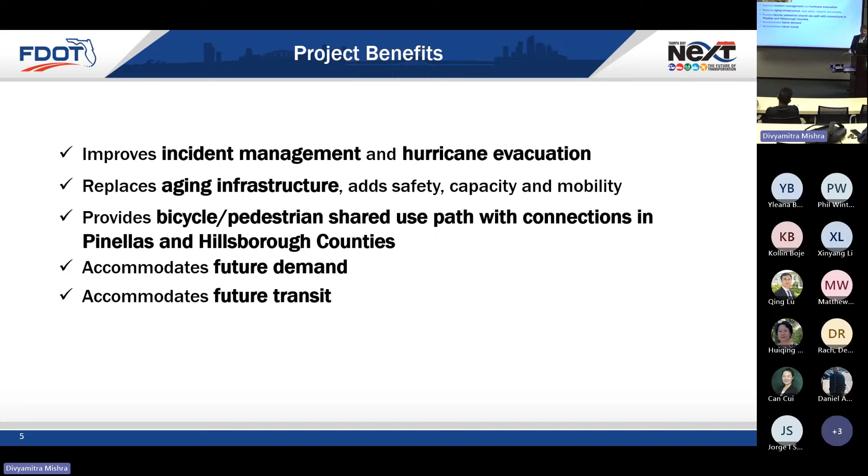I mentioned the bicycle and shared use path. That's a unique feature. I'm going to show you guys some pictures of what that's going to look like. And then the express lanes, which accommodate different modes of demand, whether we have managed with dynamic tolling or provide BRT in those lanes. And then we mentioned the future transit. So that's really the big scope of what we're trying to accomplish with Howard Frankland.

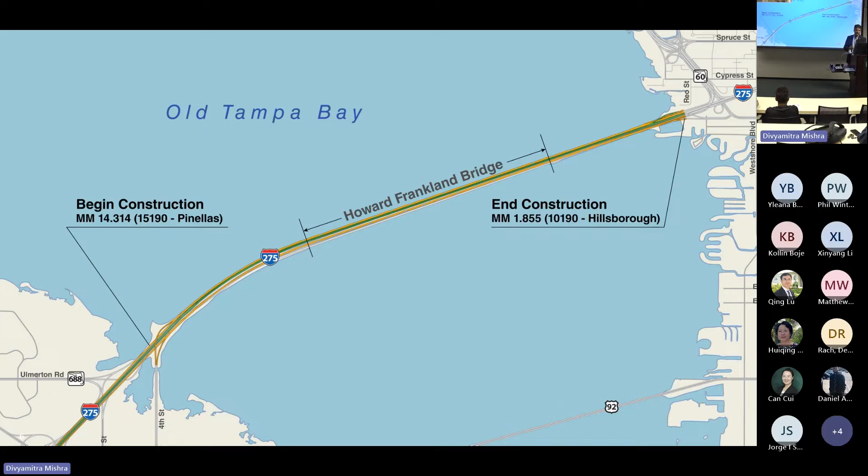All right, so to give you guys an idea, I'm sure everyone on this call or in this room has driven over this bridge. The corridor that we're constructing is about 7 miles long. The bridge itself is about 3. So of that bridge, you have the bridge in the middle, and you have causeways on either side of the bridge. So we're widening both the bridge and we're widening the causeways. You'll see that here in a minute for a place for the bridge to land. But this gives you an idea. It's pretty much encompassing all the land, the water and land mass between Pinellas and Hillsborough counties.

It's a very wide bridge. It's 168 feet wide. It is the second widest bridge in the state of Florida. The only bridge that's wider is a little heavily skewed box culvert down on the turnpike. So I'll say it's the widest bridge. It is the largest bridge by deck area. There is no bridge in Florida that has more deck area than the new Howard Frankland Bridge will when it's complete. Almost twice the amount of the Skyway Bridge.

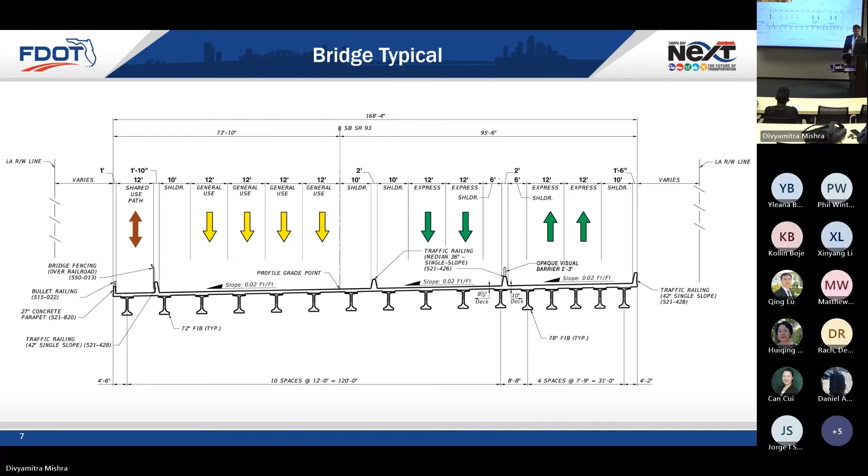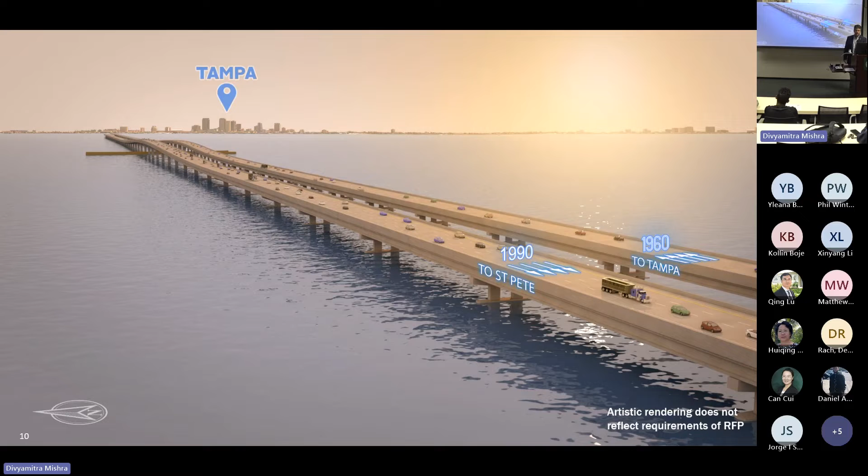All right, so just a couple animations here to help you guys understand the sequencing. Here's our current situation today. Like I mentioned before, you have the bridge on the right there that says 1960. Like I said, late 50s, 1960 when it was constructed. That carries northbound traffic to Tampa, and the 1990 structure that carries southbound traffic to St. Pete. So we're building the new bridge off to the north.

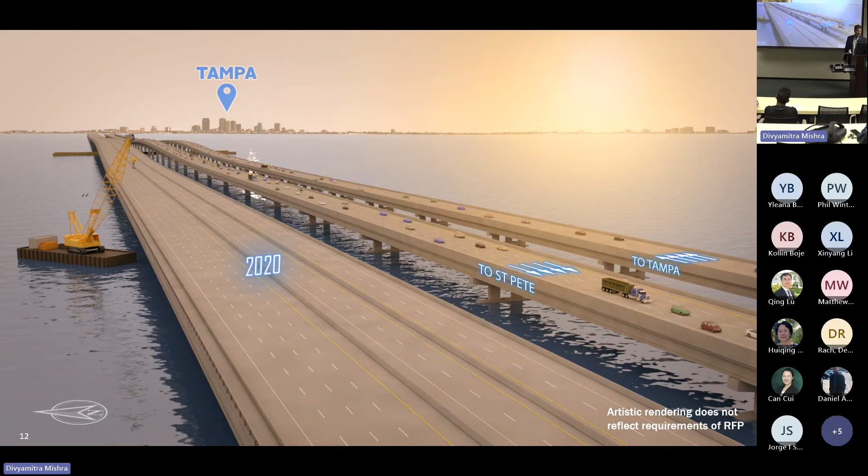So we're depicting here the typical construction method they use. Again, this is not what they actually built. This was prior to the project being let. So as we add on and construct on the north side, we'll eventually complete what we're calling the 2020 bridge. Well, hopefully the 2024 bridge when we get it open this year.

And once that bridge is complete, the first movement that we will change is the existing southbound movement. So here you can see traffic is moved on to the new structure that's carrying the southbound main line and the north and southbound express lanes. The bridge in the middle, we're doing some rehab on it. It's in good shape, but while there's traffic off of it, there's an opportunity to fix some joints, upgrade some lighting, things of that nature. So traffic will run on the old bridge until that point.

Then we'll move the northbound traffic to what was the southbound bridge. And then eventually at the end, we will demolish and recycle the old bridge. So the whole corridor will shift to the north slightly.

So let's talk a minute about bicycle pedestrian accommodation. So transportation, like we said, has changed a lot. We want to provide access as the DOT to all modes that we can. And we also know that with regional trail connectivity, there's a big push for that with micro-mobility and things of that nature. So Howard Frankland Bridge does its part by connecting existing bike facilities on the Hillsborough side. I think it even connects up to the Upper Tampa Bay Trail and takes those another option down to the Pinellas side.

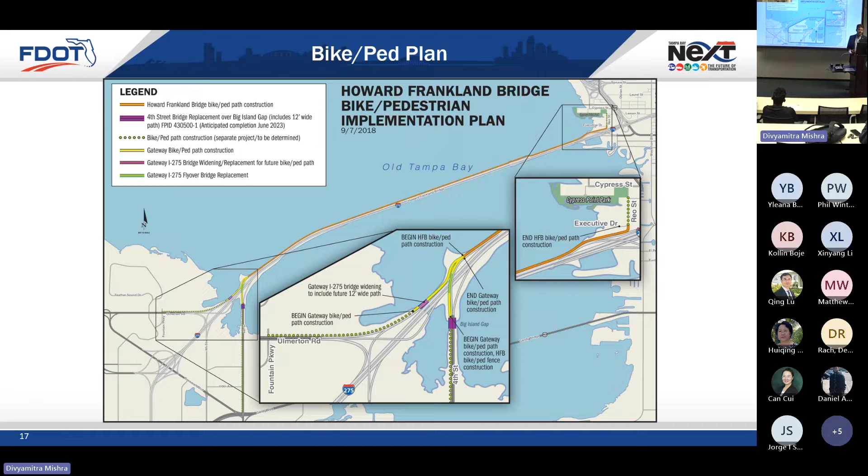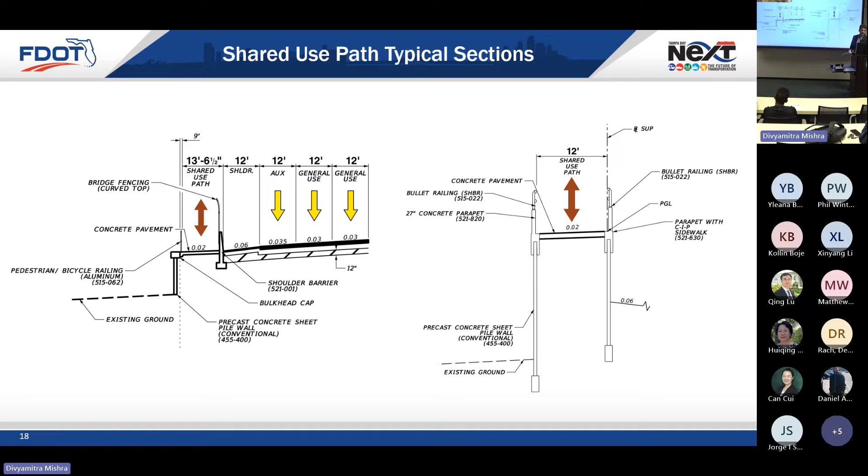All right, so just focusing a little bit more on what that looks like. The shared use path will be a minimum of 12 foot wide, and obviously meet all ADA requirements. It's going to be barrier separated from the roadway, so it'll be a safe path. But you can see here the variability that we've got in the width a little bit, 12 to 13.5 feet, and how we would snake it along the existing vehicular lanes.

All right, so another feature, like we talked about, was the express lanes. One of the reasons our express lanes work so well is they have fewer ingress and egress points; they're more for long regional trips rather than exit to exit. So with that, we do have some entry and exit points for our express lanes on both sides of the bridge. And with the department going to all cashless tolling, our toll gantries are important to, actually, I take that back. This is not that slide.

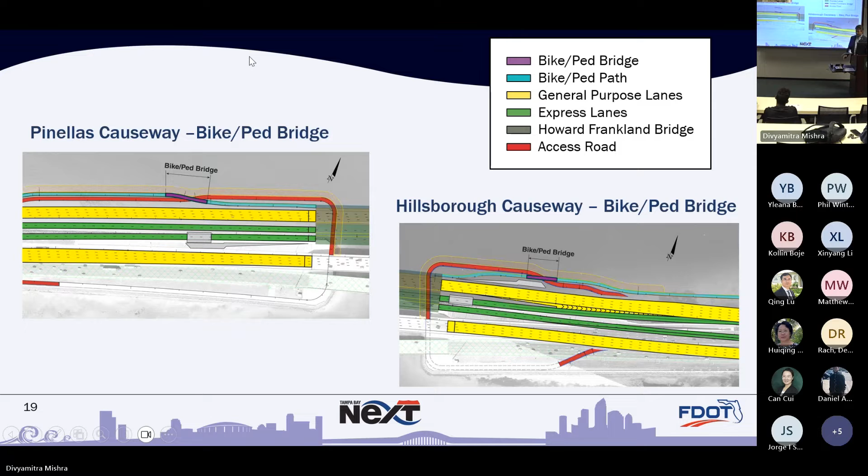On these, we had a vote for the aesthetic features. We went with a marine theme, so sailboats, and we sent a vote out to the community regarding the shape of the sails. So 2 main: Marconi sails and schooner sails. Marconi sails won out. I think it's a pretty neat little rest area if you're traversing over the bridge and you want to take a break. So we're excited about incorporating some of those aesthetic features into our bridges. Howard Frankland is not a signature bridge the way the Sunshine Skyway is, but it's still high visibility enough that it deserves an aesthetic treatment.

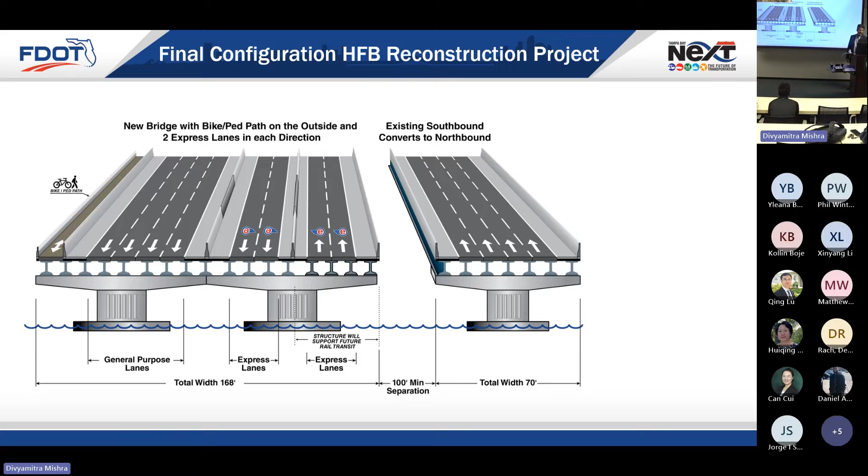All right, so in the future, what would a light rail system look like? This is just a prettier version of the typical section that shows, when we're open later this year, the configuration with the express lanes in both directions running on one bridge. So the idea in the future, if the region were to decide to construct a light rail system, we would take the northbound express lanes and convert those to fixed rail. And then we would have to widen the 1990 bridge to accommodate the express lanes, and the northbound express lanes would sit on their own structure. So no real plans for that yet, but we definitely want to make it possible in the future to do that as cost effectively as possible. So that is the plan for light rail.

What would that look like? Obviously, functioning on a concrete bridge deck, we're not going to use ballast. So instead, we'll have rubber boots with a tie block system that's anchored to the concrete. One of the things that's interesting on this job was, in case it were to be an electric type rail, you have to isolate stray currents through the bridge. Those could potentially cause corrosion. So we continuously grounded all of our rebar in the bridge to avoid that from happening.

Information there on the loading: rail definitely has a higher loading requirement than trucks or a typical design vehicle for a roadway. Here you can see we're designing right now for a diesel engine, a little heavier, but it could potentially also be an electric system depending on what ends up getting built in the future. To be clear, this is not Brightline. This is not heavy gauge track. This is more of either a rubber tired solution or some sort of light fixed guide system that we could potentially install on this bridge.

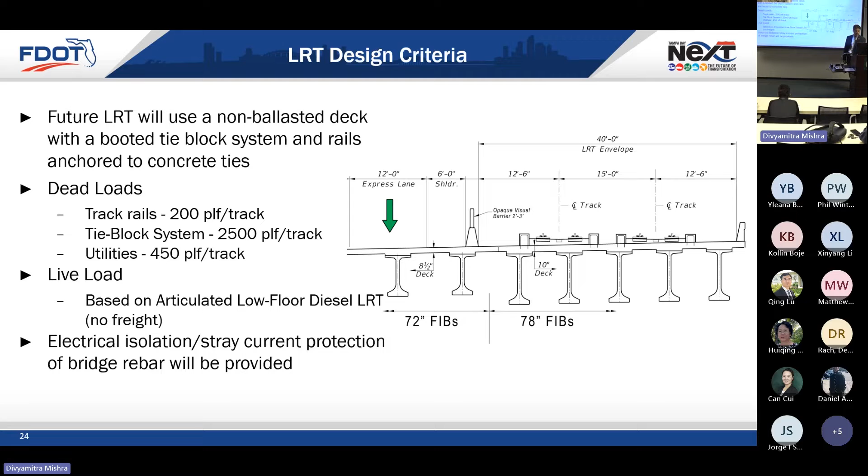Right. Focus on the causeways for a minute. As you know, you guys probably saw the news with Hurricane Ian and what happened with Sanibel. Interestingly enough, our causeways are more vulnerable to storms than our bridges are, generally speaking. So we did not want to ignore the possibility of damage to our causeway while we're building the bridge, and it'll be resilient, but we want to make sure our causeways are too. So we're incorporating several features that will help increase that resiliency.

So one of the things we're doing whenever we install this, like the seawall, like you see here on this bridge, all the reinforcement in it will be FRP. We will not have any steel reinforcement in any of these elements. The reason for that is saltwater corrosion, and theoretically, these should be able to survive for perpetuity when it comes to saltwater intrusion, just given the exposure of them. Our MSE walls, as our approaches to our bridges, will all use non-metallic straps. That's pretty standard for the environment that we're in.

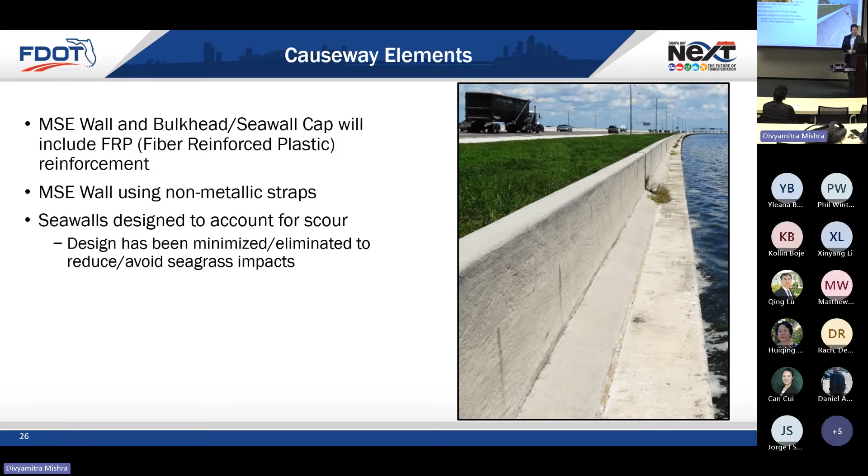And then as we're constructing, the seawalls are going to go deeper. The idea there is to avoid any concerns with scour. That was the challenging thing for this project: some of our most pristine seagrasses in Tampa Bay are located just adjacent to this bridge. So we had to build those very, very carefully and make sure we permitted any impacts and restored them appropriately.

All right, just a couple of other lessons learned from Sanibel. These two details, the one on the left at the bottom there shows a protection of MSE wall. And again, if you go out in Sanibel, you'll see those MSE walls just failed spectacularly. That was the real problem there. So here you can see we have a shield barrier concrete in front of our MSE wall that's tied into a marine mattress, which is some fiber reinforced concrete. That's again for the north side where we have a higher profile in MSE wall.

On the south side where the existing bridge is at grade, we are doing some very large riprap with marine mattresses. It's very similar design to how they're restoring Sanibel. This should be much more resilient in the face of a storm. And I can show you guys, and you'll see a slide in a minute, just how vulnerable to waves this roadway is.

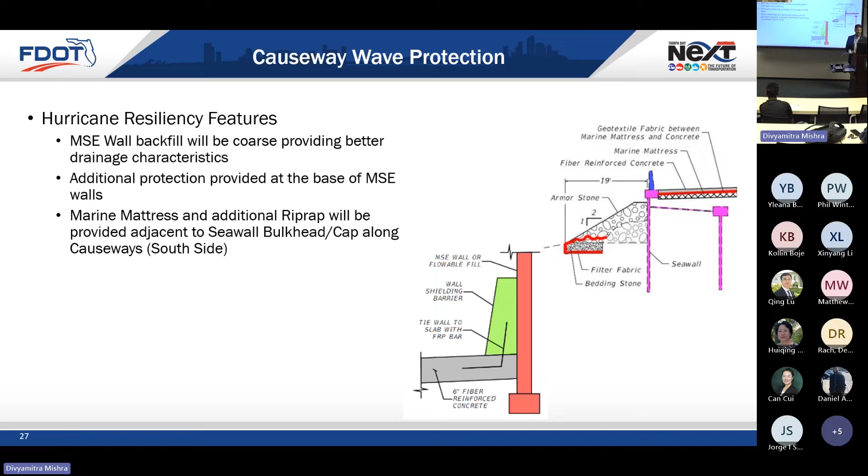All right, talk about roadway geometry for a minute. Obviously, the bridge is straight. There's no horizontal geometry concerns except for a slight curve on the west side. Our vertical grade is a 2% max, so pretty high design speed, high K value type of vertical curve here. The navigation clearances, we're still matching the 75 feet navigation clearance from the 1990 bridge.

In this picture, what I tried to describe here is when it comes to height of the bridge, there's about a 10-foot difference between the 1960 bridge and the new bridge. And so this picture is the best example I could show you. The 60s bridge had a higher percent slope. You can see there that bridge furthest away has the highest curve. And then you can tell on the bottom there, those piers are higher than the existing deck of even the 1990s bridge. The reason we're doing that is, again, for protecting the bridge from storm surge plus wave action.

We had a failure many years ago in Pensacola where a storm came in and took bridge spans right off their foundations. So that's one of the things we're doing here, again, anticipating a very long service life for this bridge.

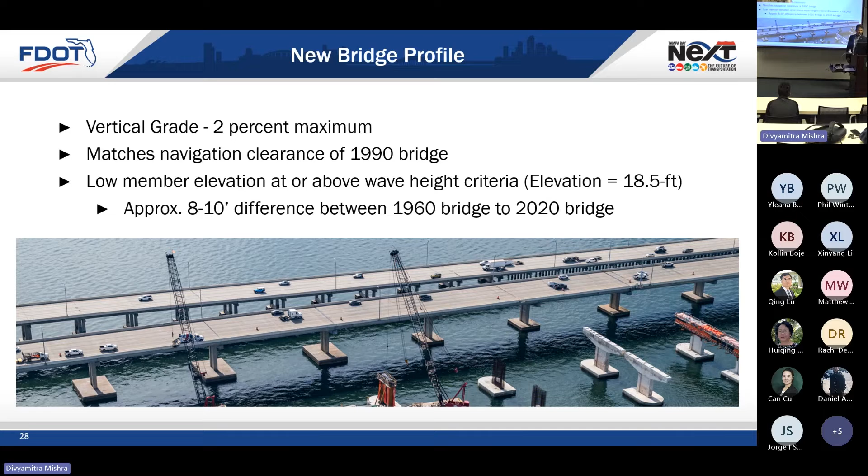As well, we're incorporating a new fender system. And again, here for resiliency, these fender systems are notorious for maintenance with corrosion, as well as getting struck with marine timber. The system that we're using now is going to be all thermoplastic. So it'll be a fully resilient system with really no vulnerability to saltwater corrosion. In addition, this used to be a navigable waterway. It's really not anymore. So personal boats, recreation boats will only be the ones that use this. But we wanted to be prepared to provide that service to the boating community.

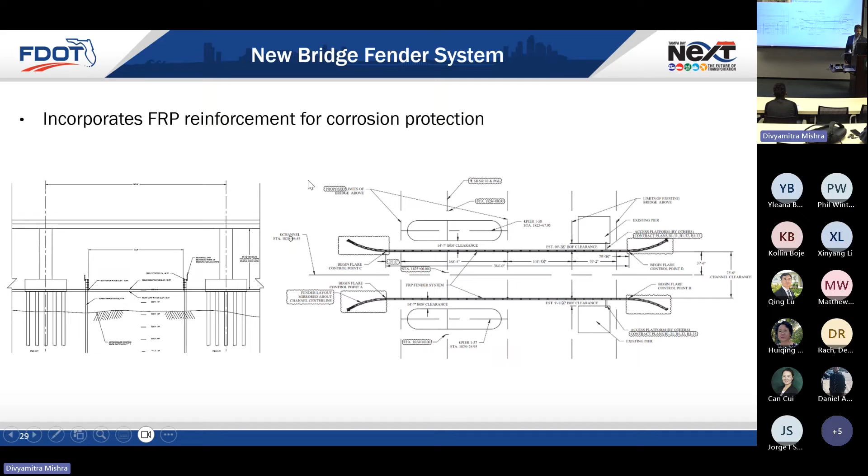All right, so I know early on there was a question asked about some geotech concerns on this bridge. The hardest part of this project has to do with the geology beneath the bay. So beneath the bay, you have a pretty constant depth. The depth's pretty shallow, 8 to 10 feet roughly. But what you have is varying levels of sediment, and you have pinnacled lime rock beneath that. So if you were to drain the water and take off the sediment, it's going to look like a mountain range down there, pretty much.

So we were aware of this from construction. We built 2 bridges right next to it. We know that this was definitely a concern. So what do we do about it? A lot of testing. This was some unique testing we did here using some tomography with P waves. You can see here in this picture, this was a P wave refraction that's supposed to tell us the interpreted height of the lime rock; we did this in 3 lines along the alignment of the bridge.

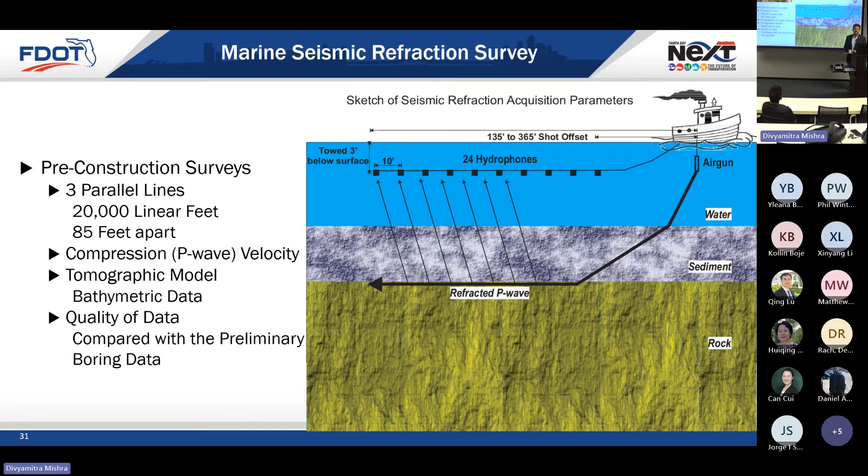So of this, we were able to get some diagrams that show you the possible depth of the rock. Now this is at the very Pinellas end, and the geology changes as you get closer to the Hillsborough side, and you'll see that here.

You can see, according to this, we have some sections that are as low as 45 feet and some sections that are as low as 90 feet. So we're already encountering a large amount of theoretical variability.

That variability continues as you move further to the Hillsborough side. Here you can see this is 60 to 80 feet. As you come closer to the Hillsborough side, we start to see a little more shallow lime rock, and then eventually on the Hillsborough side it becomes very, very consistent.

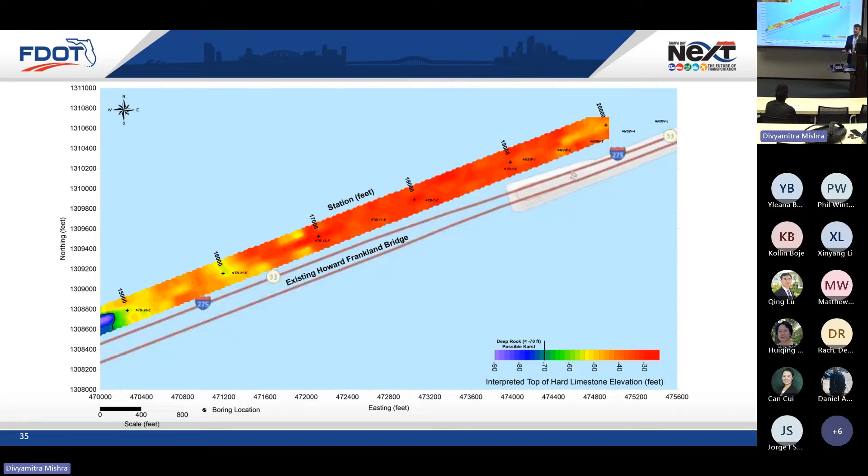That's good news, but the bad news on the Hillsborough side is the type of rock they encountered was extremely hard. It's the hardest sedimentary rock that I think there is, chert. I'll have a picture of that in a couple minutes to show you guys.

So someone asked the question about when you drive the job, you'll see we have our piles sticking up out of the ground. It would appear there's no real rhyme or reason to why some piles have 20 feet sticking out of the ground and some have 5 feet. This slide will hopefully explain a little bit as to why.

What you're looking at here is on the horizontal axis we have the piers of the bridge, and on the vertical axis is the elevation. The blue line shows you the shortest pile on a particular pier, and the yellow line shows you the deepest pile in that same pier.

For instance, if you look right there between pier 37 and 42 east, you have a pile that goes all the way down to 175 feet, and you've got a pile that stopped at 95 feet. So you're talking about 100 plus feet of variability, and this was the existing southbound bridge.

We're experiencing this and more on the new bridge. You could have a pile that you drive between here and the other side of the screen, and vertically they'll vary more than 100 feet. That's how variable the lime rock is in that environment.

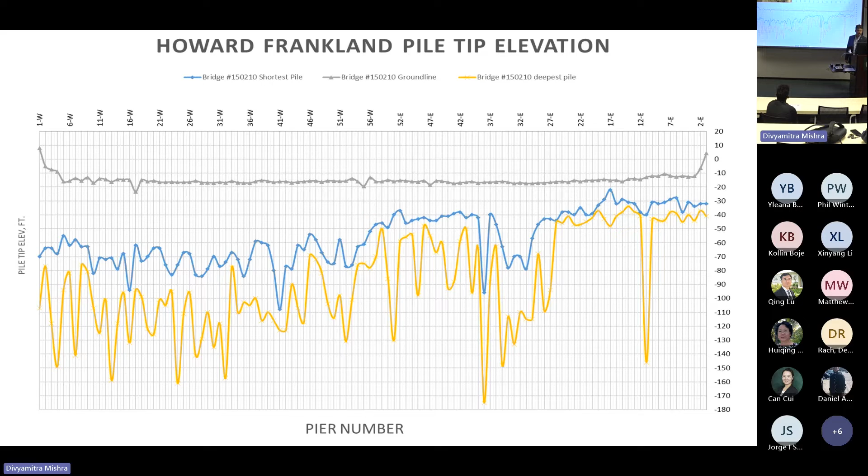All right, we'll talk about tolling now. This is where I thought we were at. Again, express lanes require a thoughtful placement of ingress and egress points to maintain service levels, as well as putting spots where people could potentially enter and exit them.

So we do have two entrances for the express lanes in Howard Frankland on both sides of the Causeway, and each of them carries a gantry. I mentioned before, all of this will be electronic tolling. We're going to a full cashless system with SunPass, and there's an infrastructure required to ensure that stays up and operational in a rather difficult environment.

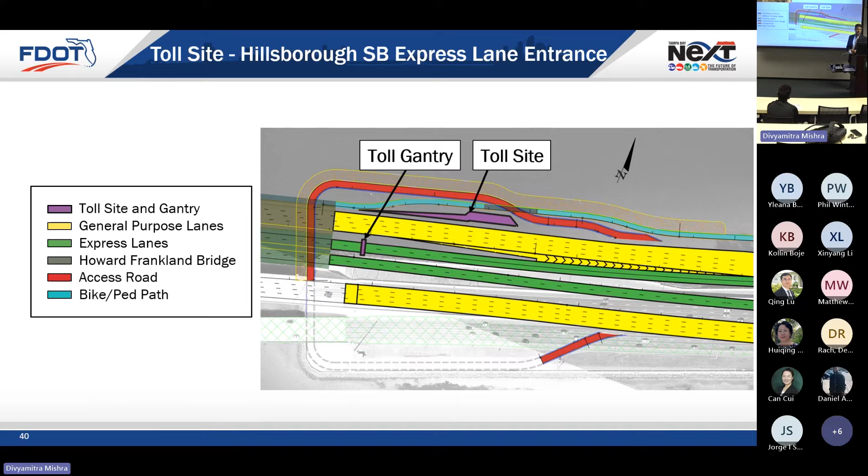Wanted to talk briefly about, as we've done with the design, how do you get from design into the ground? So a job like this, you have to hire a contractor, and we have a lot of options in the toolbox for procuring contractors for our jobs. This particular job is an adjusted score design build. Most of our larger jobs go design build for a number of reasons.

Wanted to talk a second about the process for developing an RFP for design build. Basically we tell the contractors what we want. This RFP said we want to construct this new bridge with these features, but we don't provide them a whole lot of guidance otherwise. It's up to them to provide us their solution, and one of the things we want to see as part of that is some innovation. The idea is, if you put it in the hands of industry, you're going to get more creativity than just an owner who might be focused on one particular design.

On this job, I think in the beginning we had 3 or 4 firms who were interested and submitted letters of interest, and then 2 firms moved forward to a technical proposal. The team that won was Archer Western, a joint venture with Traylor Brothers. Traylor Brothers ironically built the 1990 bridge, so they teamed together, and the other company that proceeded forward was Granite. Archer Western and Traylor Brothers won.

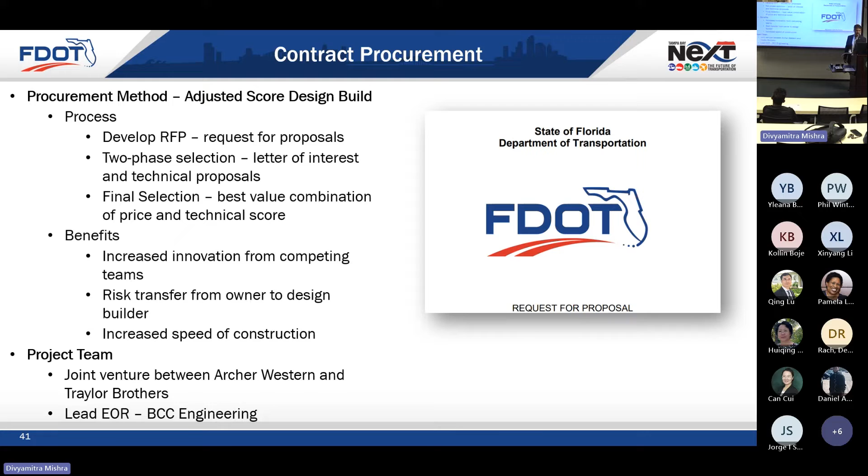All right, so where are we at to date? Right now, the project just achieved a milestone of completing all of our piles. Over 3,000 piles have been put into the ground, and these are not small piles - these are 30-inch concrete piles. It was a lot of work.

Our substructure is very nearly complete - our footing is at 93%. I want to say the bridge is about 140 spans, and about 90% of our bridge columns are done. Then you move up to caps, and our decks are really the main thing you're going to see being built right now.

Just to give you an idea of the breadth of this job, you have almost 7 miles, 107 football fields. The bridge deck, like I mentioned before, is the largest in Florida, more than double the Skyway. And those bridge piles, put end to end, you're talking about 40 miles long - that's from here almost down to Bradenton. So a lot of embankment, a lot of concrete. It's a very big project.

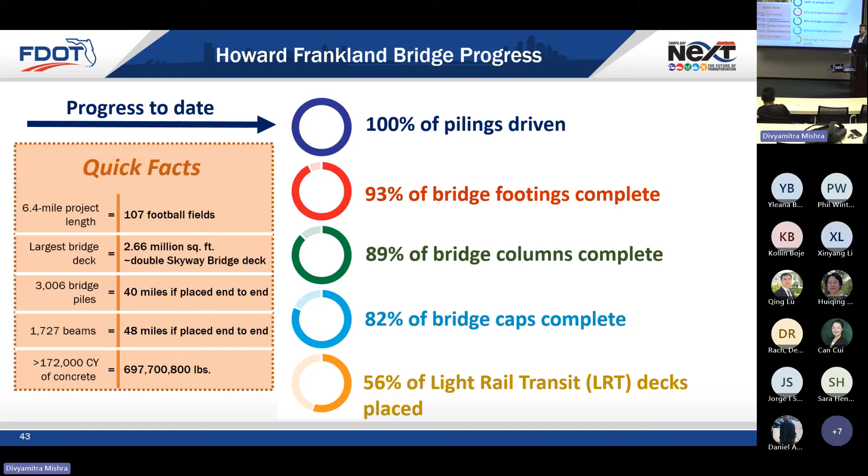The nice thing about it is it's repetitive, so the contractor has gotten very good as he's built. It's like building 140 mini bridges, and he's gotten very good at this point at being efficient with his construction.

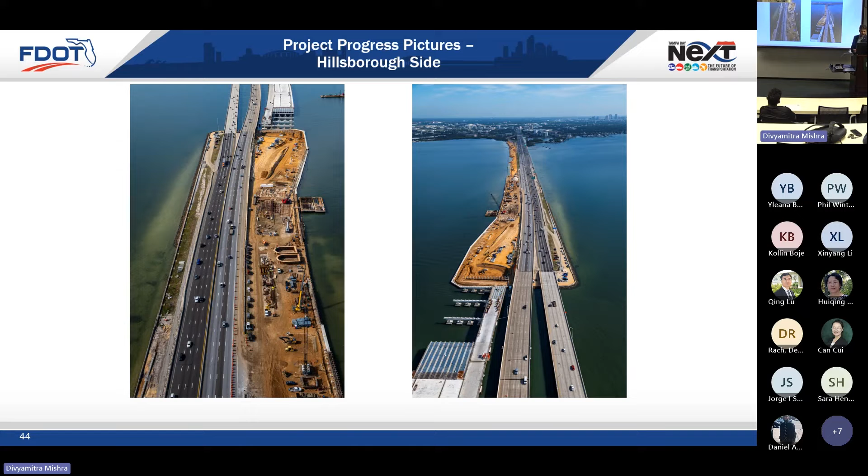All right, just to give you some pictures of how this looks - what this is showing you is the Hillsborough Causeway. Because we're building the new bridge to the north, we had to widen the causeway to receive those lanes. That's what you're seeing here is the construction of the embanked area with the seawall caps that are being built. You can see the concrete in the picture to the right. So that really gives you an impression of what was going on there.

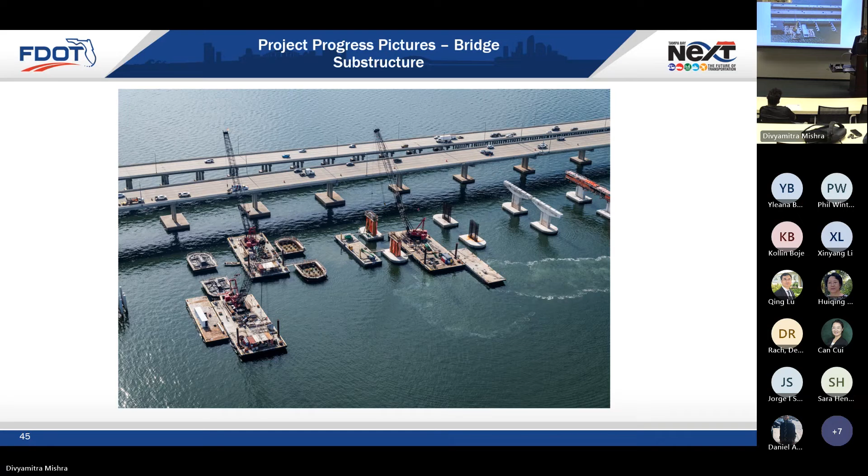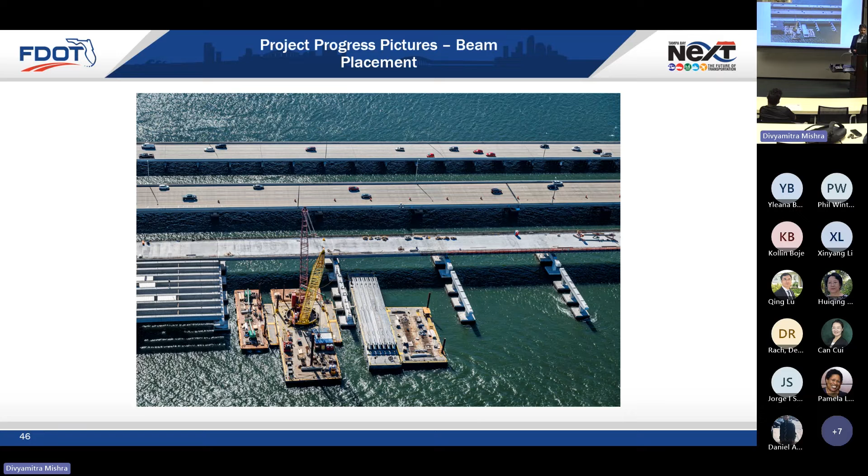You can see here flying the beam lines and setting up for that, and then afterwards you see the deck placement. So here's a good idea: you see on the very right the stay-in-place forms, next a cured deck, and then where they have the burlap or visqueen over a deck that's currently curing.

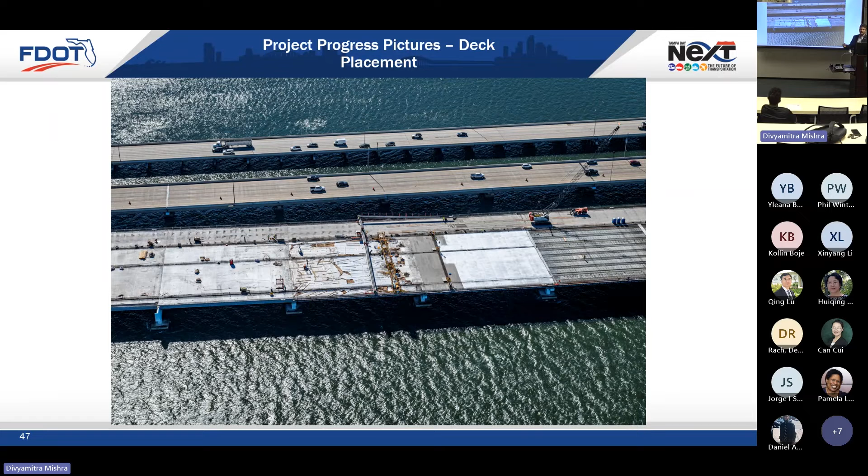The contractor is using a bidwell system to construct these. He is building this deck in 2 phases. You can see where that crane is standing - that was the deck for the light rail, which was a thicker deck. He constructed that first, and then used that as a work platform to build the remainder of the remaining width of the deck, pouring that span by span. I'll show you how they're doing that in another slide here in a minute.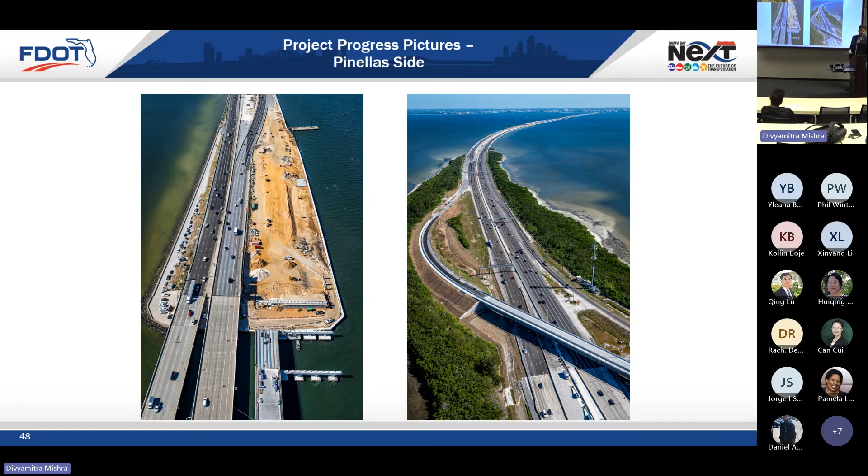Next, the pile variability I'd spoken about before - that sheet showed you on the old bridge, we had a pier with almost 100 feet of variability. On this one, we're nearing more like 170 feet of variability in the same pier. Why is that important? The contractor has to pick a particular pile length for a particular pier, and if he has to drive further, he has to splice it. That could be a potential delay for him. About 10% of the piles on this job had to be spliced, and that was one of the biggest risks the contractor had to take on. Drilling through the chert, like I said, was a very difficult thing to do. I'll talk about on a future slide the MSE wall aggregate design change we made as a result of Hurricane Ian.

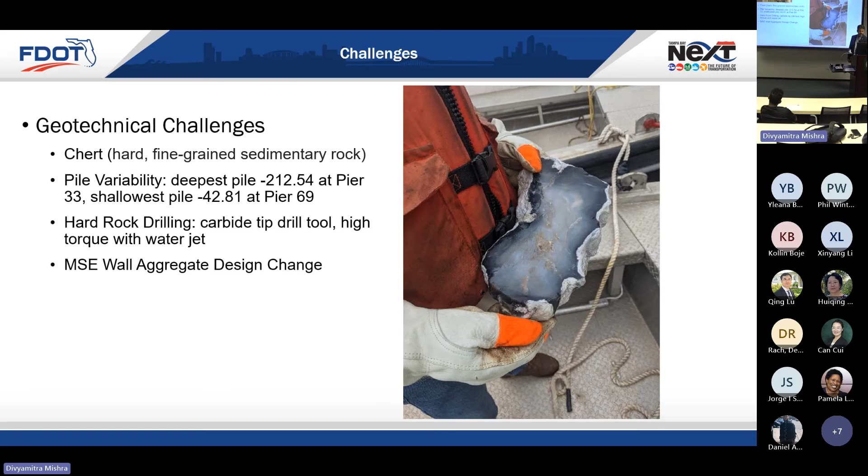In this job, we had a lot of environmental permits to comply with. We had to get a permit from basically every federal agency that governs anything over the water: Coast Guard, National Marine Fisheries, SWFWMD, DEP, you name it. Some unique requirements were the quiet zones for pile driving - we were required to keep about a 1,000-foot exclusion zone between our pile driving operations. The idea was the sound waves from the pile driving would affect the fish, and you wanted to give marine life the ability to pass through the work zone without incurring that damage.

The American oyster catchers, pictured on the right, are the little protected birds that decided nesting in our embankment areas would be a good idea for 2 years in a row. A big challenge to work around them, but both times they nested, they successfully hatched chicks and left, and we were able to resume construction. So it was a win-win for everybody. They're cute little birds that don't actually eat oysters or catch them, but they're called oyster catchers.

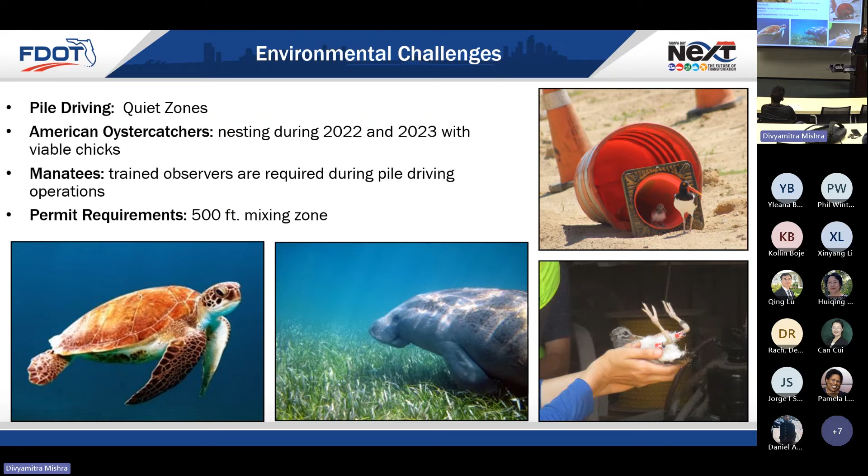Manatee watchers - anytime we have a barge movement during pile driving operations or anything else, we're required to provide watchers to ensure we're not impacting manatees if they're going through our waterways. For water turbidity, we had to maintain a 500-foot mixing zone, obviously to keep the bay water pristine. So a lot of restrictions there, but we were able to really overcome a large number of those very easily.

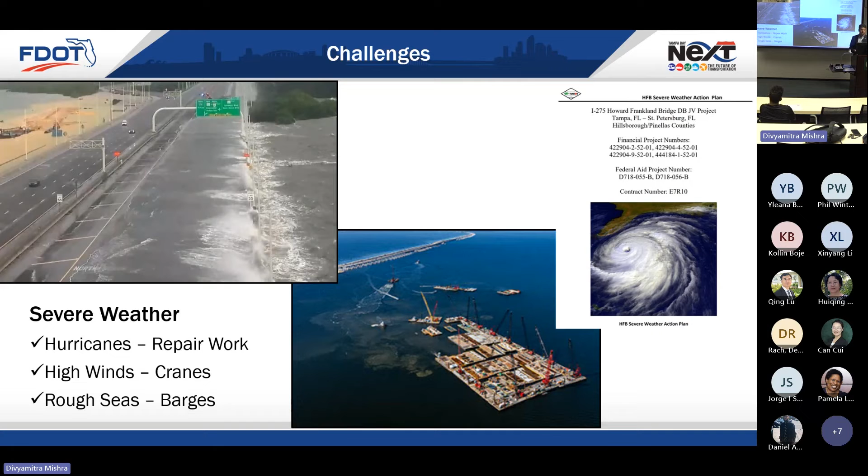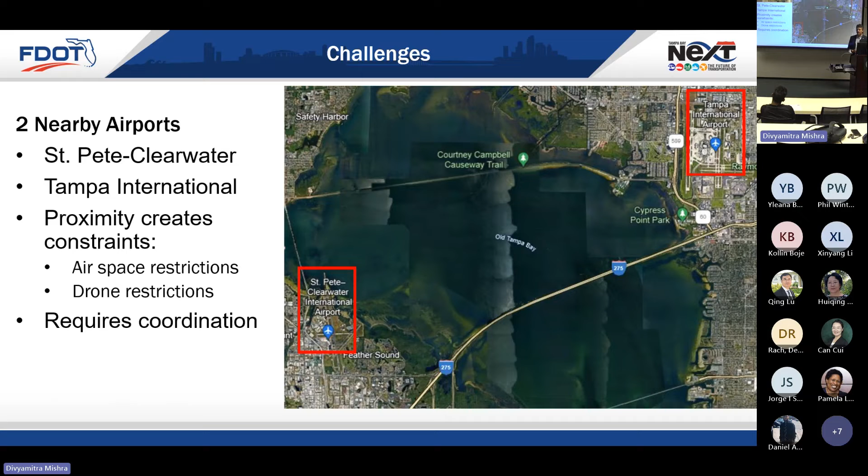Another thing is that on either side of Howard Frankland, we have two major airports. Airports and cranes typically don't mix, so we've had to work with them to make sure we abide by the airspace restrictions. There are required restrictions for drones and things like that, and that's just something to point out.

Logistical challenges: like I said before, you have a marine fleet that at its peak was 60 barges and 30 cranes. As far as labor required to build this, you're probably looking at about 300 craft laborers to construct this project in the time frame allowed. They're still close to 300, but now that pile driving is over, the job is on its way down.

Supply chain - we've been really fortunate on this job because of its size. It has garnered the attention of a lot of our suppliers who have been maintaining their supplies. Things like embankment for the causeways, concrete, and our precast concrete elements - we've worked well with our partners to ensure we get the supplies we need. This job was let before COVID, so all the inflation and stuff that's happened since then has been a big challenge for the contractor to work around.

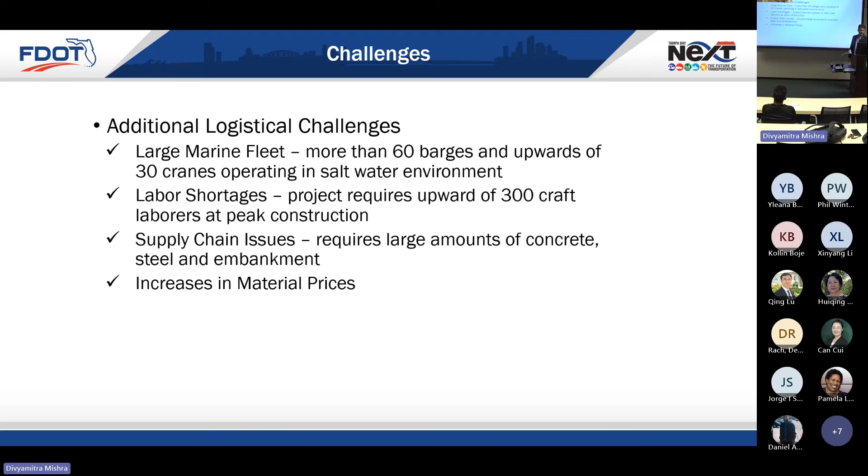Almost finished, a couple more slides.

Resiliency - one of the big things we talked about, I want to show you a picture. This is the end bent in our MSE wall, where the two pieces of equipment, the roller and the little tractor, are sitting on all 57 stone, which is coarse rock. We put that there because it drains much better than embankment. The failure mode at Sanibel was the MSE walls blowing out due to lack of drainage through the backfill, so this is one of the ways we're finding we can protect the embankment area as well.

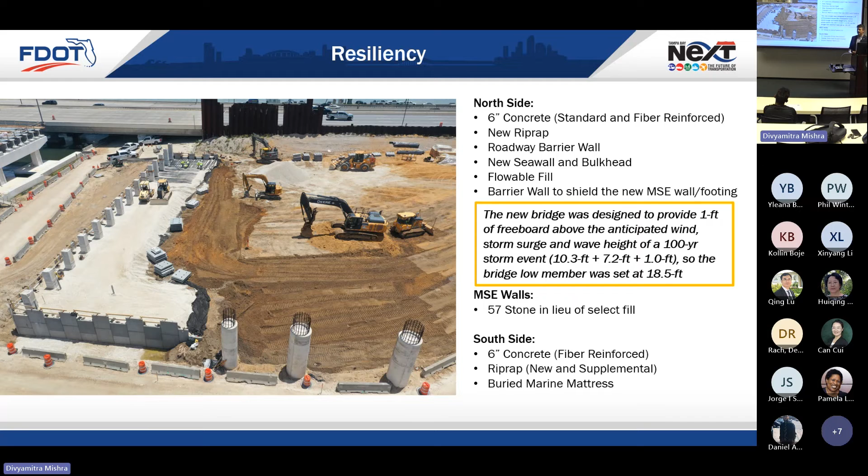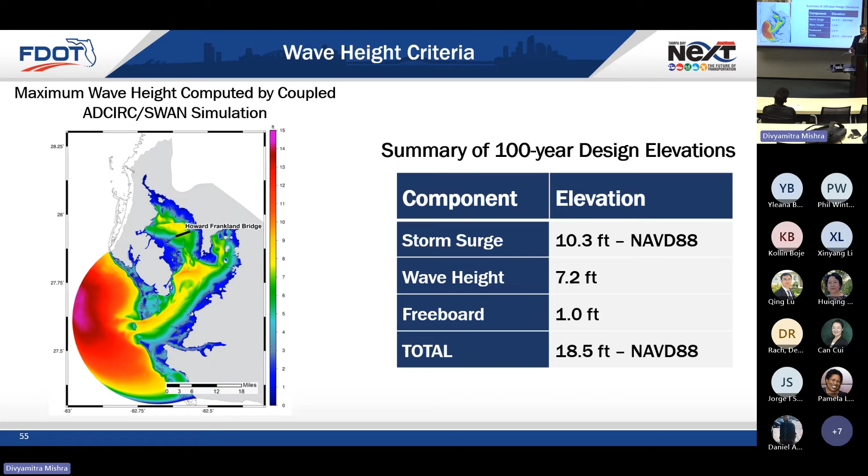I won't go too much into the other improvements we made, but we're doing marine mattresses, riprap, and setting the bridge elevation so that it's 1 foot above what we think the worst case wave action would be in a 100-year storm coming up Tampa Bay. Here we have a model depicting wave heights for that storm - you can see we could anticipate up to 18.5 feet of water rising between storm surge and waves, and it would still be below the bridge.

Just a couple more innovative features. One thing they did on this job was 100% PDA. Usually you have to drive a test pile, then get a production depth and drive from there. PDA allows you to immediately know the capacity of your pile, and on a job with 3,000 piles, it's pretty important to keep your schedule by relying on the increased capacity a PDA gives you.

I'll show you a picture of the conveyor system, how they're pouring concrete from the existing bridge - it's pretty neat. We talked about the shared use path and the aesthetic features on the scenic overlooks.

Dropout forms - again, this is one of the innovations you get from a contractor who does the same type of work over and over. For our hammerhead caps, instead of building the forms each time, they had reusable forms where the bottoms would drop open so you could just pick them right off. So something that might take a week to dismantle, they found a way to do in a day. There are little efficiencies like that they're able to achieve.

Pile cutoff saw - this is neat. When you finish driving, you might have piles with 20 feet of excess for cutoff, some with 5. Pile cutoff is one of the most dangerous operations in marine construction, really any bridge construction. So they developed basically a robot, almost like a bandsaw, that would automatically cut through the pile without anybody being anywhere near it.

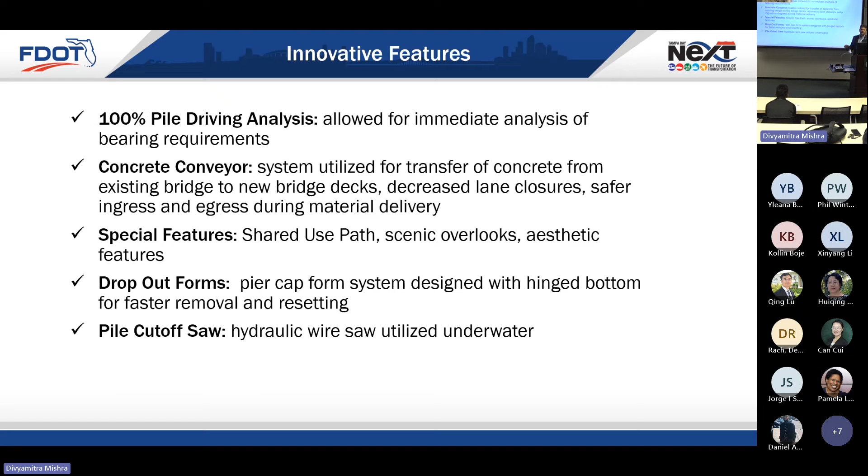So much safer and much quicker, much more reliable. So quick picture of the pile driving. I'll just skip through that. Here's the conveyor system. Like I said, they pour concrete from the existing bridge where the traffic shifted on the southbound bridge, and they'll convey it over the water and pour it into, you can see there on the left where the bid well is running, and pouring that deck. That's worked really well.

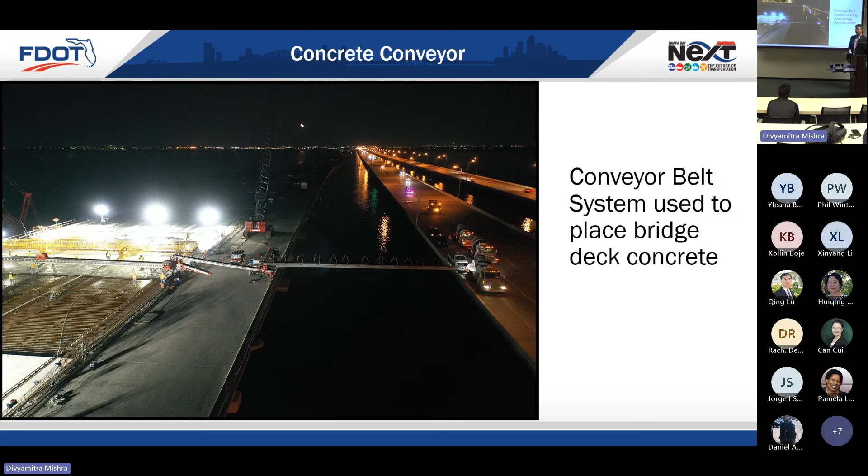We cast all our bridge decks at night because of humidity, and that's a good thing.

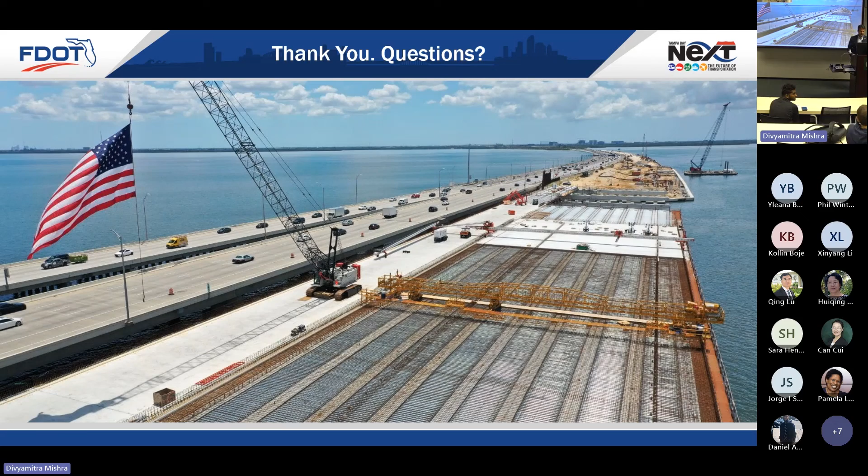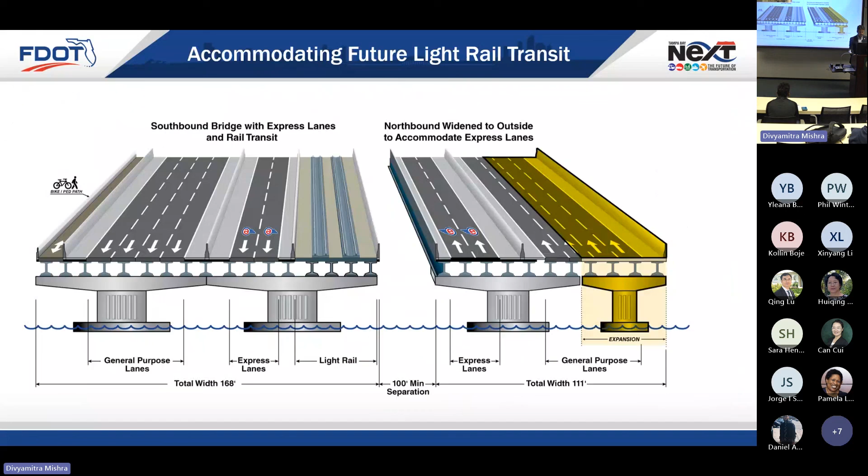Hi, a very nice presentation. My question is about the scenic overlook. So if we can just go back to the slide, I love the design, but I was just wondering, is there any provision, like if a bicyclist or pedestrian is on their way and it starts raining, is there any provision to protect them from such weather conditions?

Yes, you see the concept there does show some bench areas that have some sort of sheltering. So the idea would be that they could go under that if they need to. But yeah, that is something that we want to consider. Thank you. I have another question.

So I was just wondering, this is from my personal experience. My father just started working. It's a pavement job, and he deals with a lot of contractors, and he faces a lot of challenges. So I was just wondering what it is like to work with contractors. Are they diligent? Are they notorious? What's the delay because of them?

No, it's a great question, because contractors are different than engineers, and then we have a lot of contractors who are engineers, so there is overlap there. But I think really the thing about working with contractors is figuring out how you get to the point where you all have the same goal, right? You want to finish a job, but you have it for different reasons. And so to really work with a contractor, what you have to do is understand what their goal is, and their challenges.

They're a for-profit business. They're there to make money, and if they make a mistake, you gotta help them, even if it's not your mistake, and vice versa, right? Because you might have an error in your plans, and you don't want them calling you on the carpet for it. So there's opportunities for conflict for sure. Contractors, especially low bid contractors, they're not quite as concerned about that sort of interaction. They're more, hey, this is the bottom line. You can help me or you're not.

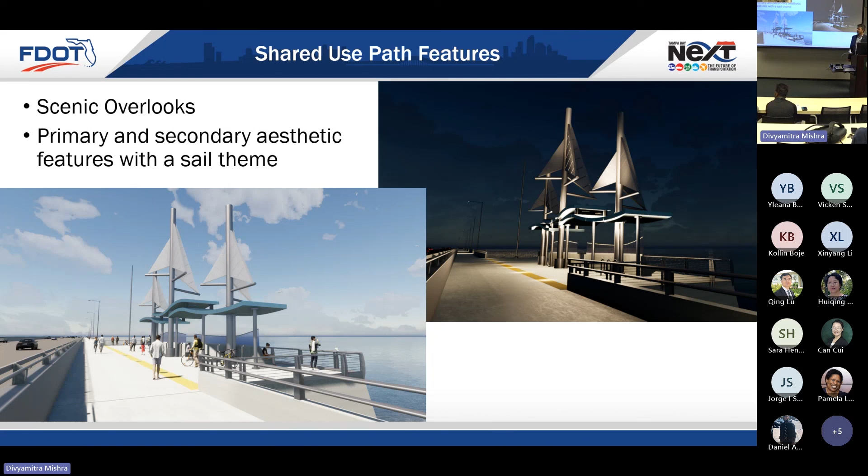But I do know we have 275 in downtown St. Pete, where we regrooved a bridge that had basically polished. The surface was very, very smooth. That was probably 4 or 5 years ago, and there was a history of wet weather crashes, and there was also some horizontal geometry, some curves that were a little more challenging than what we have on Howard Frankland. But yeah, I certainly can look into that.